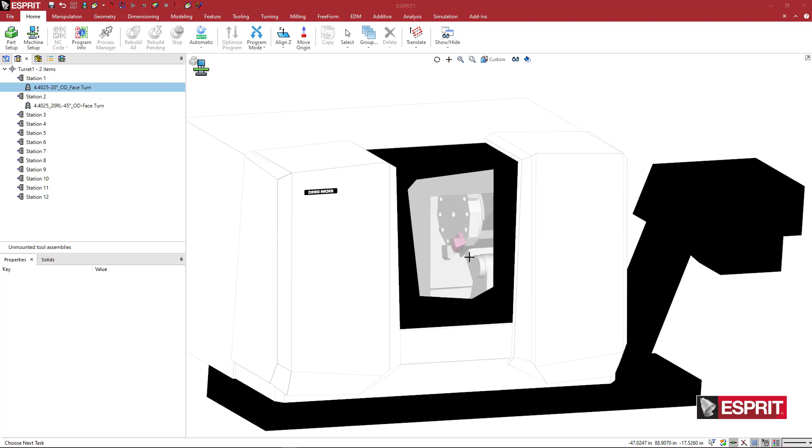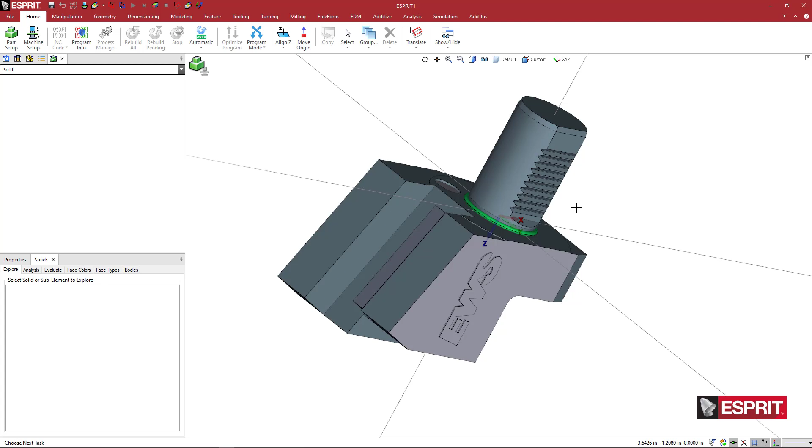Okay, so this is a VDI-40 style holder. This is an EWS holder, as you can see, and we're going to go ahead and create this to be used for simulation inside of Esprit. So looking at this, the first thing that I want to do is orient this holder in the proper orientation, and we've got some tools for that.

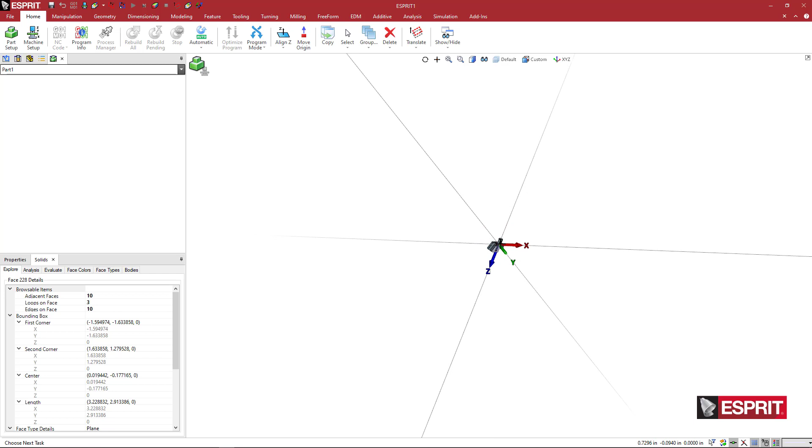If you've seen some of the other videos, this might be a repeat, but basically, this is the face that interfaces or sits up against the turret. And I want this W, this blue vector here, to be oriented the other way. I want it to go from here up into the turret.

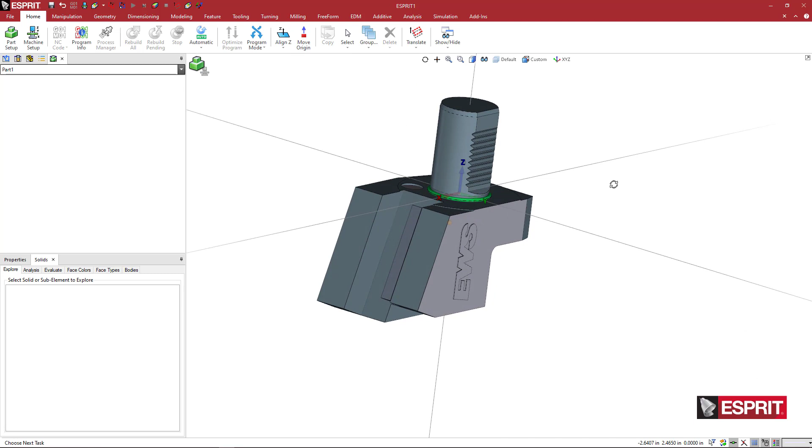So to do that, what I want to do is basically select this face, and I'm just going to use, on the home tab, my align Z command. So once I do that, it goes ahead and reorients my model so that the Z, the W, the blue axis, is pointing up into the turret.

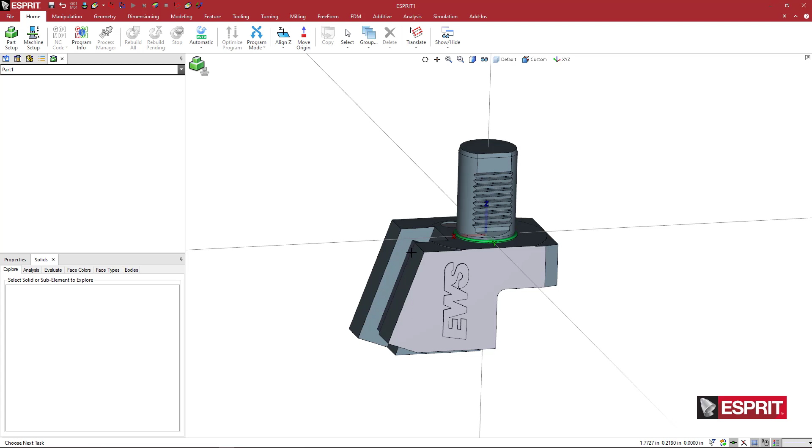So if the turret was in front of me, I'm standing in front of the machine, and this was at the bottom of the turret, this is the proper orientation, because if this is mounted in the OD, it's going to sit in this orientation with the tool side at the positive red axis. So this positive red x-axis I want pointed toward the main spindle.

So what we want to do now is create this is how it would appear at the tool station. So when I load this solid onto the turret, this is the home position, which is typically going to be at the face and the center of the VDI bore.

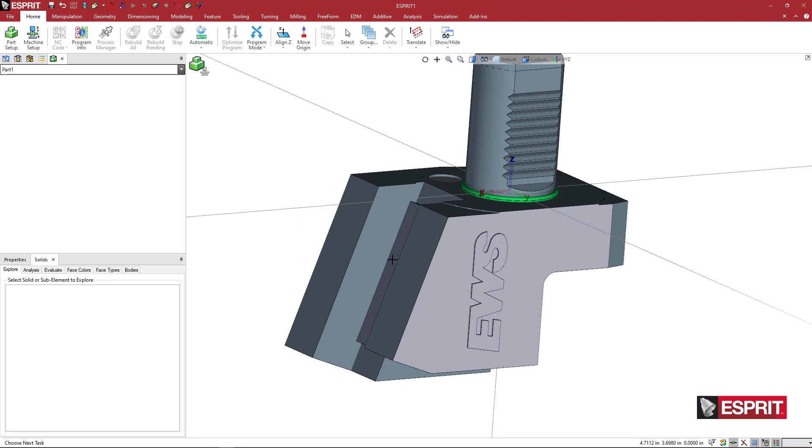Now what I want to do is create the pocket, the definition of where the tool is going to appear in the pocket, and that's going to be here. This is a 20-degree tool, and we have an angle, so what I want to do is reorient my UVW. So instead of reorienting the part, we're going to reorient the actual UVW axis here so that when the tool appears, it will be in that orientation.

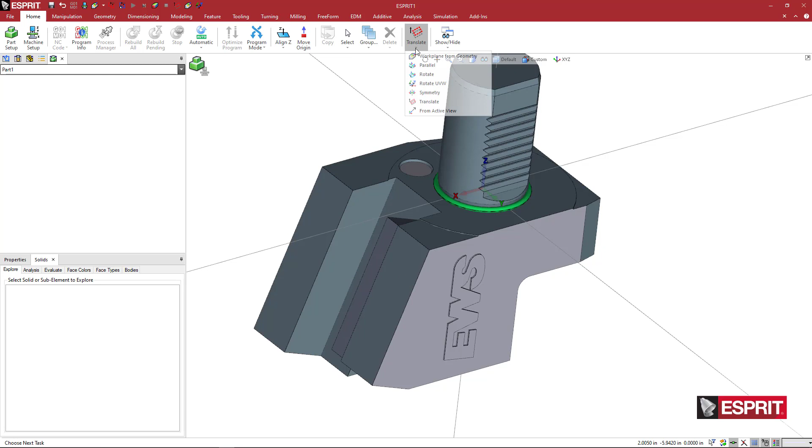So we're going to come back to the home tab, and we're going to pick one of these, work plane from geometry. So when I do this, I want to find some normal face that would define my z-axis. So what I'm going to do here is just pick this front face, okay? And you can see that my z-axis, this is kind of the axis that the square shank is going to be along.

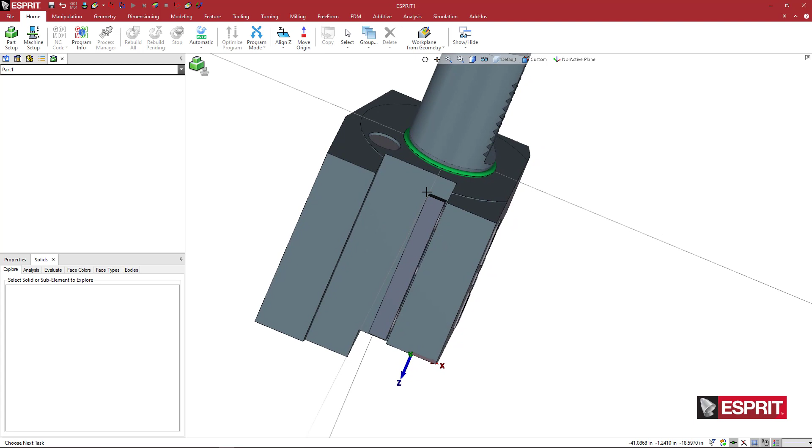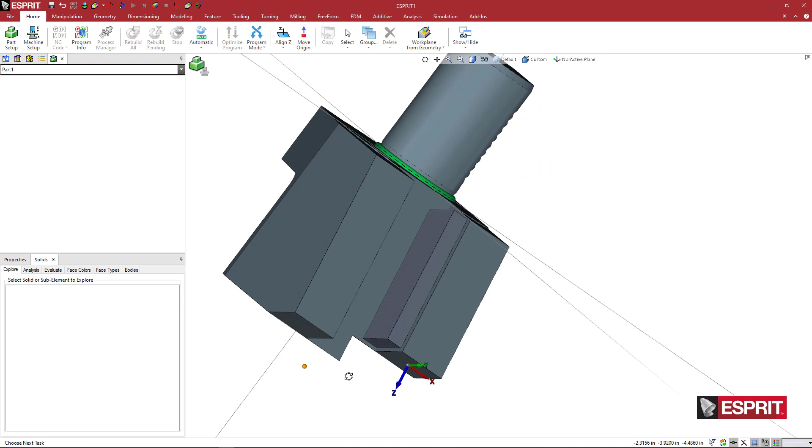So now what I want to do is find that base position, because when my tool appears inside of Esprit, when I'm creating a new turning tool, I want basically the beginning of the tool, the holder, to start here, extend this way with the insert over here. So what I'm going to do is look for a spot that I can create that with.

So I see here that this portion right here, it's kind of hard to explain, but I guess this stopper block for the tool, this looks like it's centered in the pocket. So I could probably just grab the center portion of that.

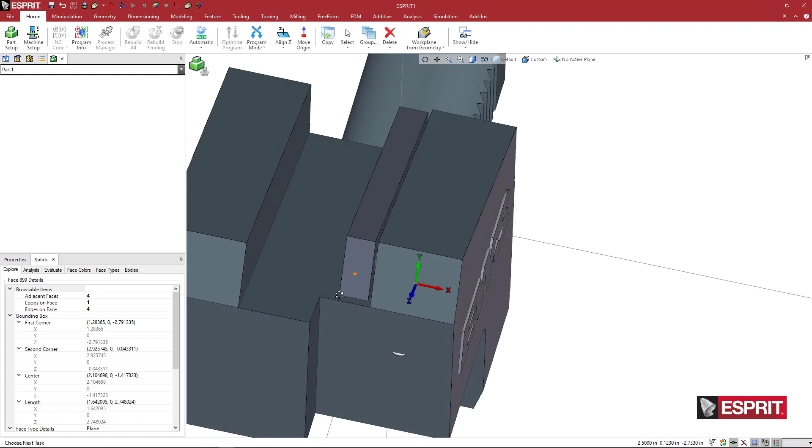So what I'm going to do is just come to geometry, go to rectangle, and I'm going to pick this Y0 portion, this center point, and this back corner, which is going to be the highest point here. So my tool shank is going to start at this position and go this way.

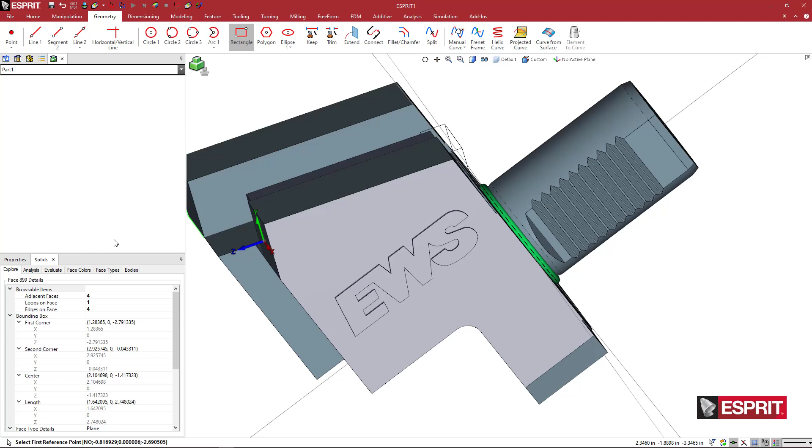So looking at this, what I'm going to do is come here to home, and again come here to translate. I'm going to pick my icon, and I'm going to pick this center point right here. So this is the point that's at Y0. It's at the midpoint of the span of the shank.

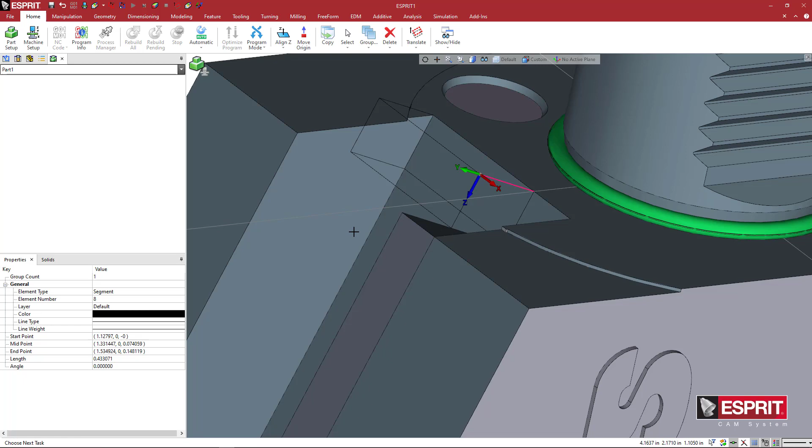Let's say, I don't remember what this is. I think it's 25 millimeters, so it's going to be at 12.5. If I pick this segment here, 0.433. So what is that distance? 0.433. We'll come up here to calculator, 0.433 times 25.4.

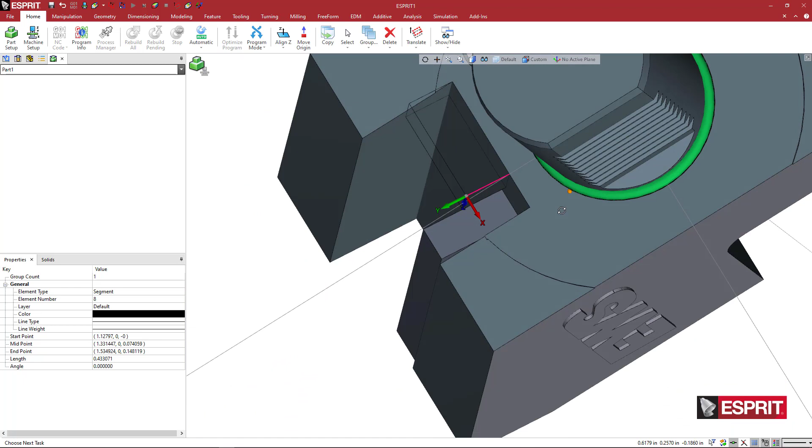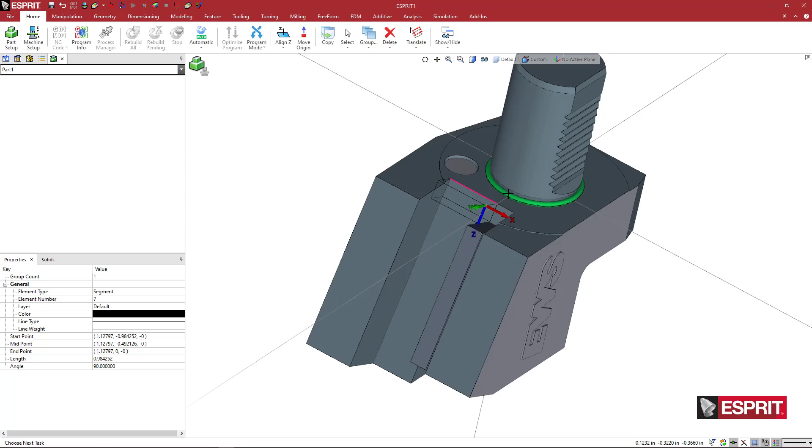That's a bizarre number there. Let's look at this one. 0.98. So this pocket is 0.98. Yeah, it's 25 millimeters. Okay, so it should have been 12.5. So this looks like this.

What I'm going to do here is I'm going to create a point just to make sure that I'm in the right location so that the tool shank that's 25 will come in the right spot. So this is interesting in that this one does not have a span here that in this direction doesn't seem to be at 25.

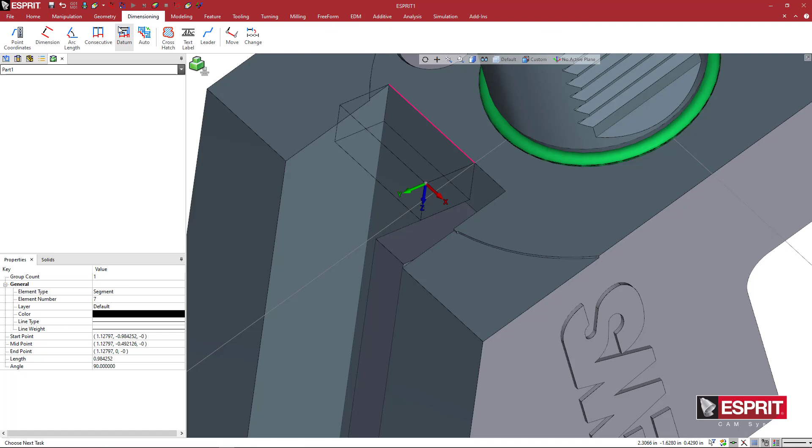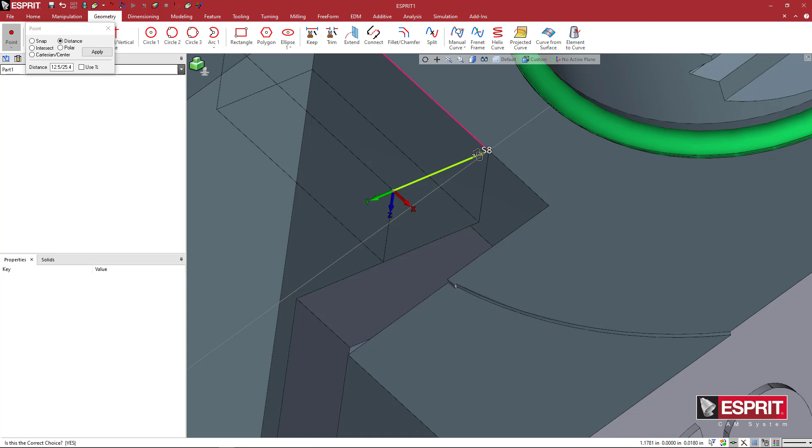So I'm going to come here to geometry and I'm going to say point, distance. So what I want to do is put in 25, half of that distance, 12.5 divided by 25.4, and I want to pick near this, the end of this segment away from that so that when it creates the point, you see the point created at the opposite distance.

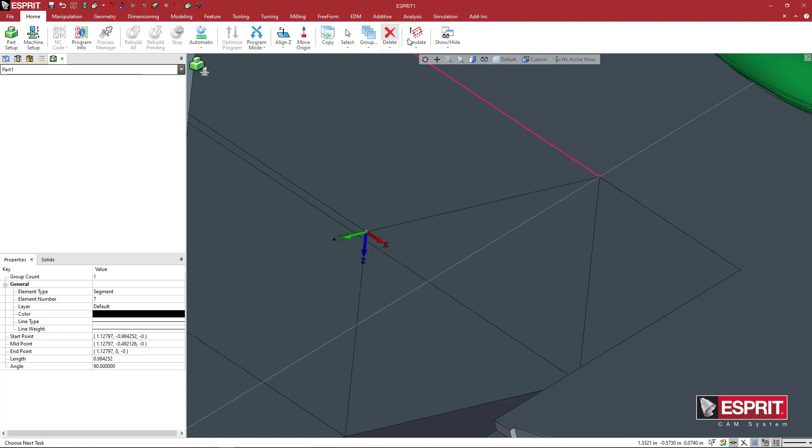So a little tech tip here, if you want to create a point further off of this edge, you'd put a negative in here. So this, I'm going to do another translate, to this point here.

And now this represents the midway of that 25, 12.5 millimeters. So I want my

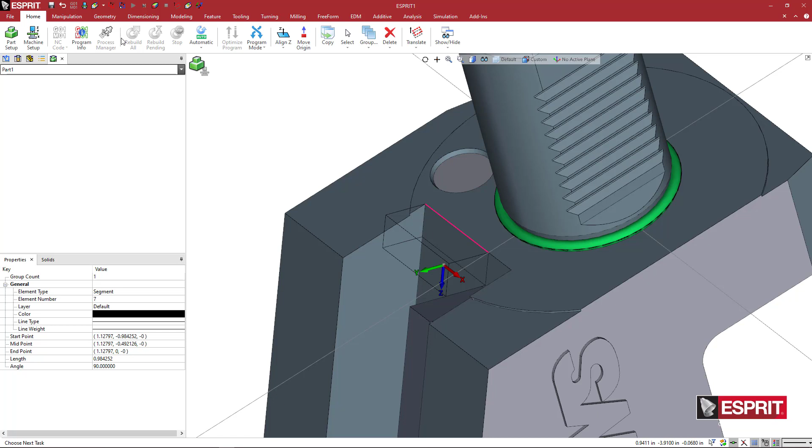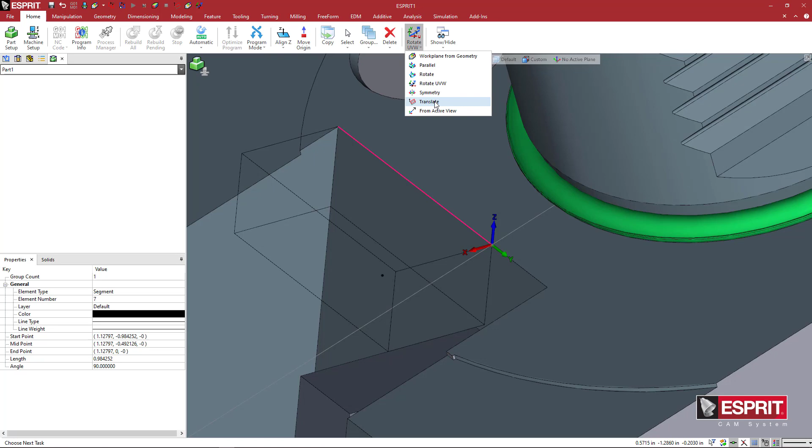z-axis going this way and my x-axis going this way. So maybe what I'll do here, I think the easiest thing would be to come here and do work plane from geometry. I'll pick this segment and this segment, and then rotate my UVW 180 about U, and then I'll do another translate to this point. So now my tool shank will start here and go in the normal, or parallel opposite to the XY plane in the negative direction, with my insert pointing in this direction.

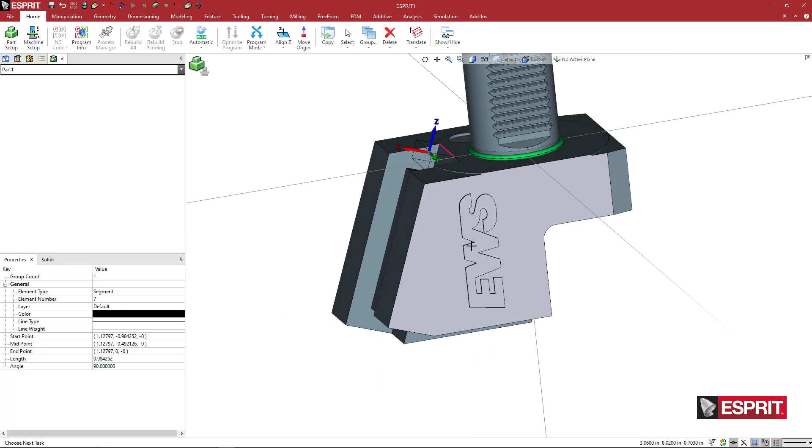So I can go ahead and create my GDML at this point. Well, actually, I gotta create, I'm thinking ahead here again. I'm going to go ahead and go to underscore tool axis underscore 1, and then I'll create a holder adapter underscore 1. So a tool adapter is going to be created here, and then if I want to use like a GDML holder that I would load from a different vendor, or maybe EWS makes them, but if I wanted to load in a custom square shank holder, I have the reference point for that as well.

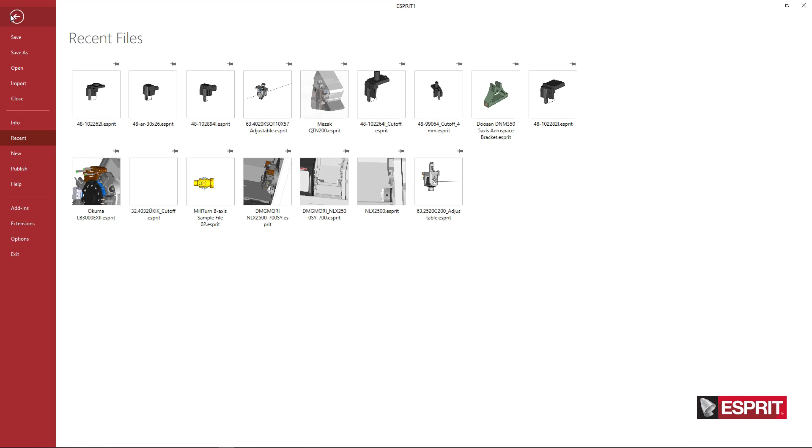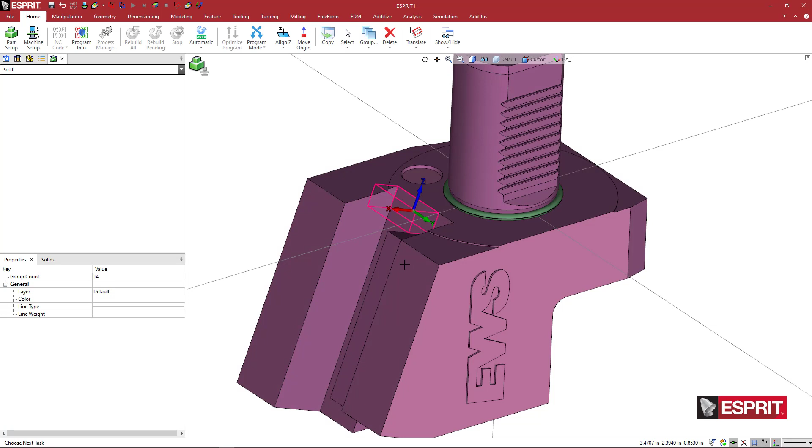So now at this point I can come here to file and save this as a GDML, but what I'm going to do is change some of these colors, because I would prefer to have a different color besides this greenish shading here. So what I can do is grab basically the whole thing and come here to properties, color, and I'm going to set this to a light gray. And when I click elsewhere, you can see now that my whole solid looks uniform, looks a little bit nicer.

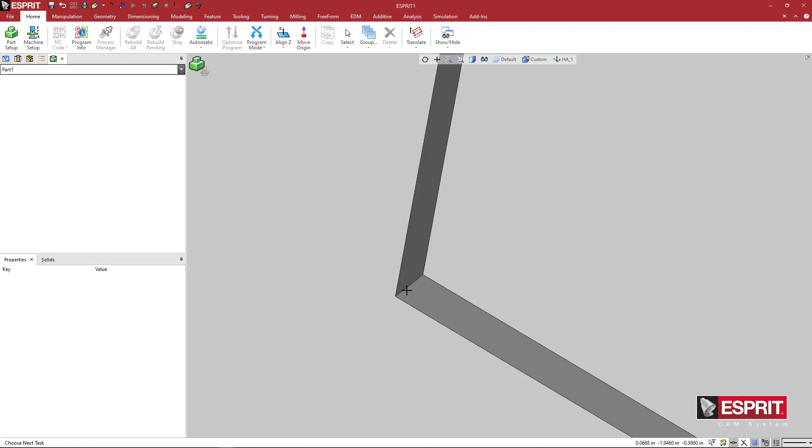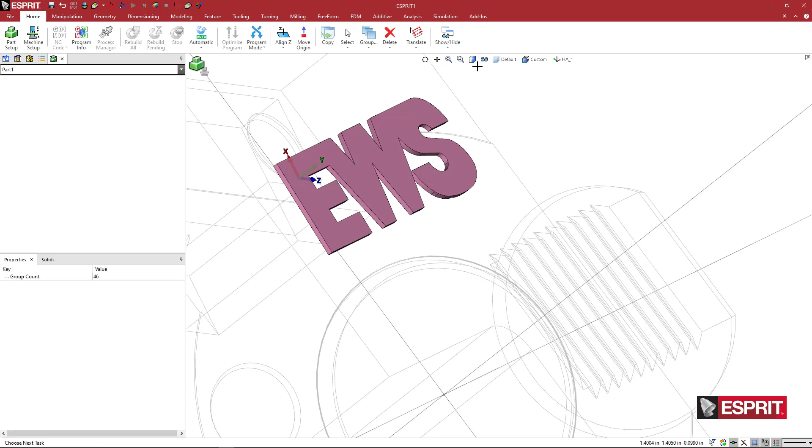But now I want to go ahead and pick one of these edges on the side of the logo. So I'm going to hold my Shift key on the keyboard and grab that ribbon of material here, and you can see that the outside ribbon is completely selected and highlighted, and then hold Control and pick that top face. And now I can right click and say copy. I'm going to come to attribute, pick blue, and I'm going to go back to a shaded view so we can see that. And now we can see that the logo is highlighted in blue.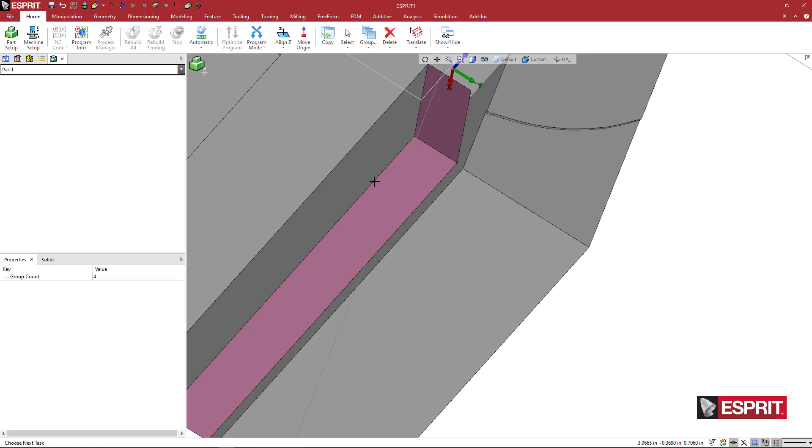And now if I want to get a little bit more detailed with this, you can do the same thing maybe with this tool slot. I can grab that, I'm again holding Shift. I pick one of these edges, and it's going to grab that wrapping ribbon of edges, and then hold Control only on the keyboard to add this top face. And I might want to rotate and zoom in and grab this back one just in case, I'm zooming in and I want it to look nice.

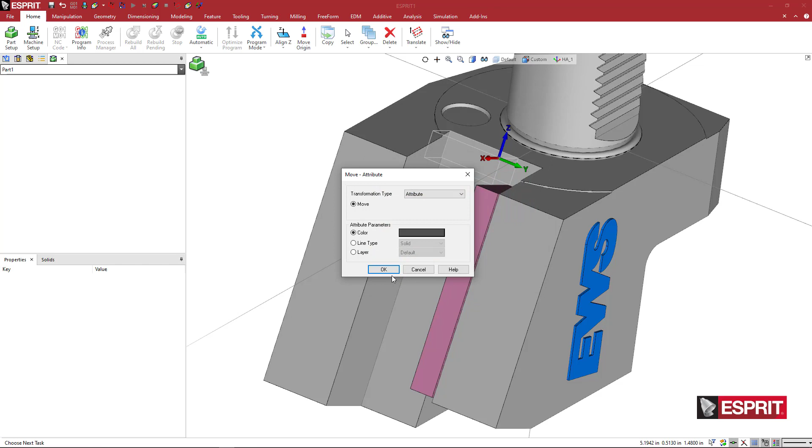I'll right click, say copy. I could pick a different shade of gray here, maybe something like that. And now we have a holder that has my tool axis, or my tool adapter position, my holder adapter position. The colors all look uniform. My holder is oriented and at the 0 center point.

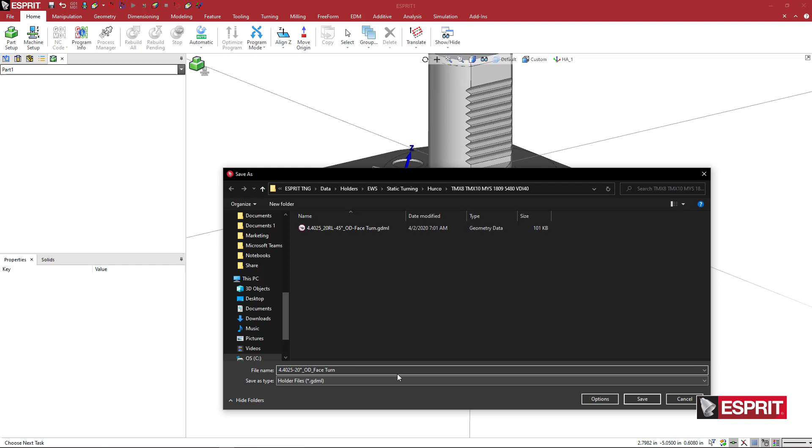I'm going to go ahead now and say File, Save As. We're going to come here to Holder Files, GDML, and I'll call this OD Face Turn, because if it's mounted on maybe a VDI disc turret, I'm not sure if this could be mounted on a face turret or not, but I'm going to go ahead and just put that in the name here. I'll say OK, and we can now load this in Esprit simulation.

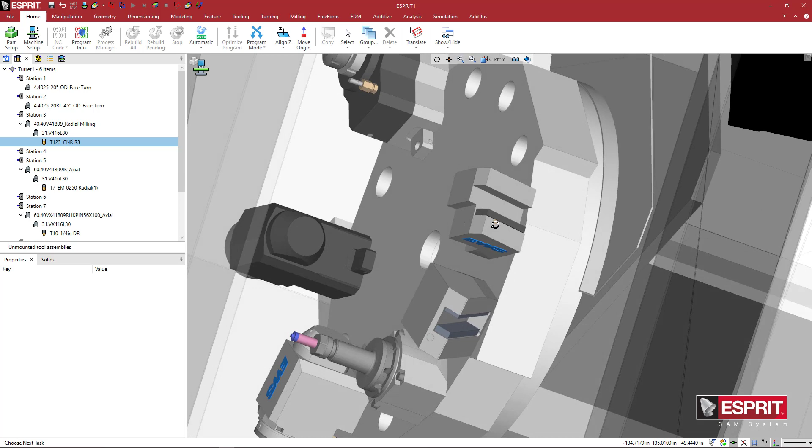So when you have this on the turret, now this is a face mounted turret, and I don't even think that these can be used on the face, but just because of the way the notches are, but I could be wrong about that. I've never set up one of these disc turret machines.

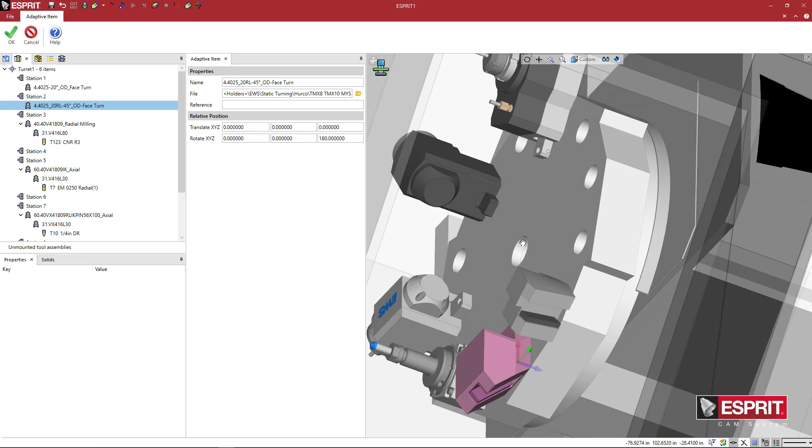So looking at this, any of these can be edited. So like I was saying before, if I load this, I have 180 here. So these orientations can be changed. If I change this to 0, it's going to flip that holder around. Obviously, you're not going to use it that way. But you can put in, so if you have an OD, it could be facing toward the main or facing toward the sub.

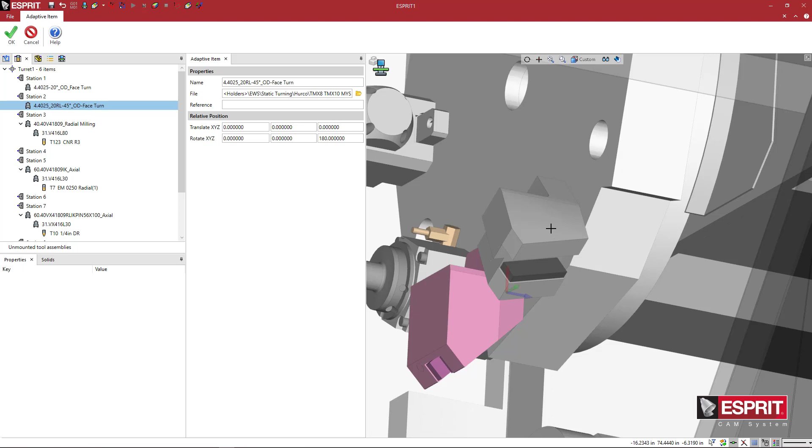And I'm not sure, depending on, like on a Capto, depending on where the hole is, how you mount it into the machine, do the turrets flip back and forth? And the same thing goes for the milling holders. So if I look at these milling holders, again, these are mounted on the face, so they're really only going to be mounted one way.

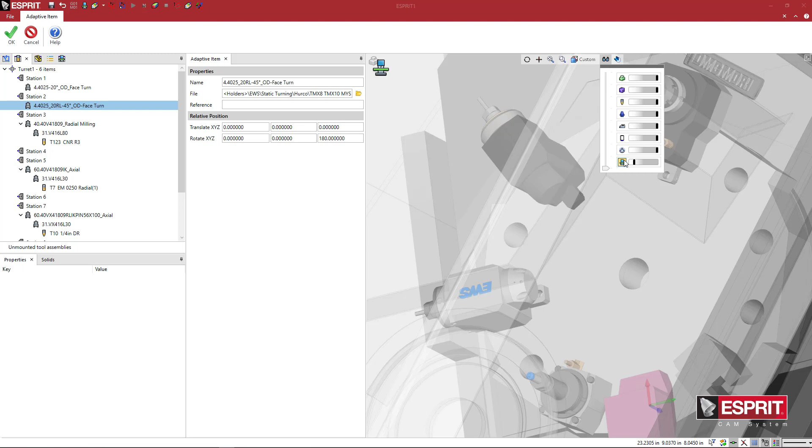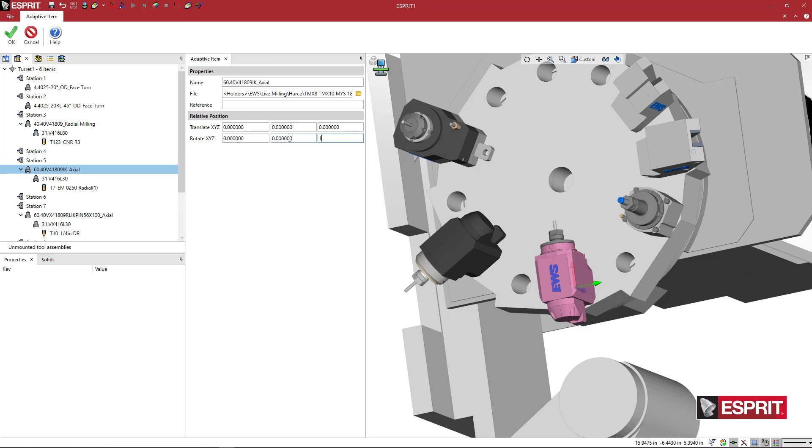So let me turn the machine off. We can see this a little bit better. If I come down to one of these holders, looking at this guy, you can change that orientation however you want. So depending on how it's mounted in your machine, you can use that to control this. So even if you made the GDML in the opposite orientation, when you load it into Esprit, if it's not in the correct orientation that it would actually be mounted on your physical machine, you don't have to redo your work. You could just come in here and put in the orientation angle that you want and get it set to the proper orientation.